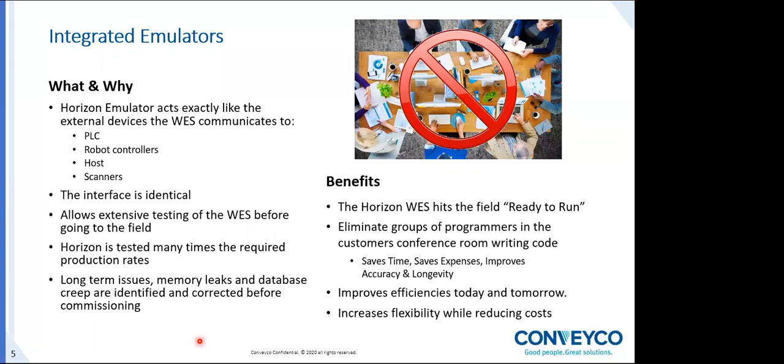The faster a system starts up, the more confidence the operational team has in the system, and that is everything. We want the operational team to believe, and if we want them to believe, we have to be ready, and our stuff has to run. Next.

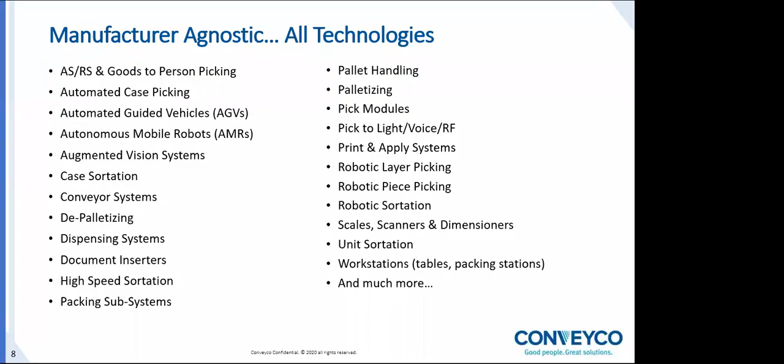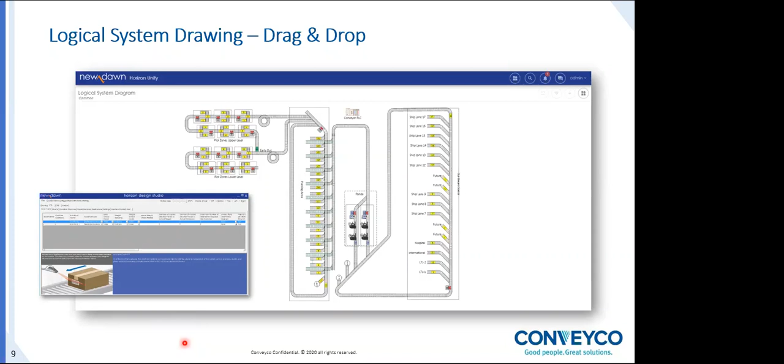This is a key to a lot of our modularity and ability to set things up. And we have a video that we'll jump to here in a second. But what we can do with a Java-based, a Visio-based tool, is create your conveyor system. And we can do this in a very short period of time. And then using that screen you see in the lower left-hand corner there, we have a plethora of parameters we can adjust to configure your system. Let's go to the video. To the videotape.

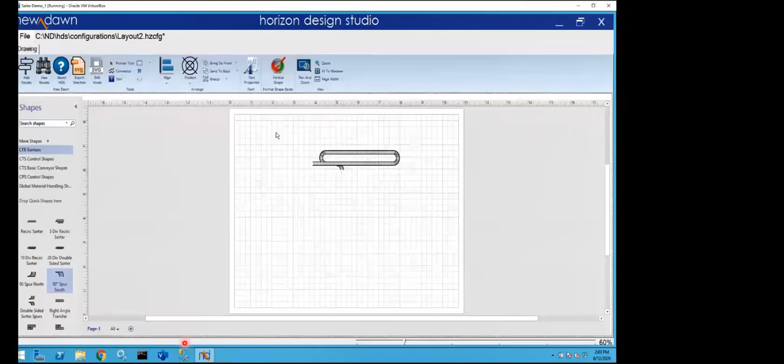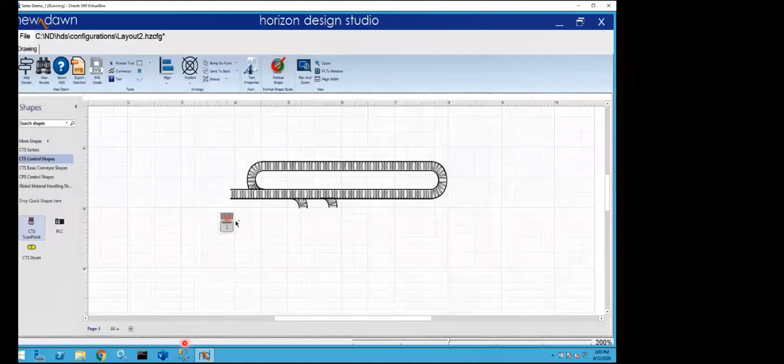Okay, first off, we grab a sample recirculating sorter. And then we're going to throw some diverts on it. Blow it up. Not literally, I hope. Put another divert on there. Then we get to where really the significant part of this is. These are all the control points. We add a scanner. We identify the scanner, and the system gives you defaults, which can be overridden, but 95% of the time are exactly what you want them to be.

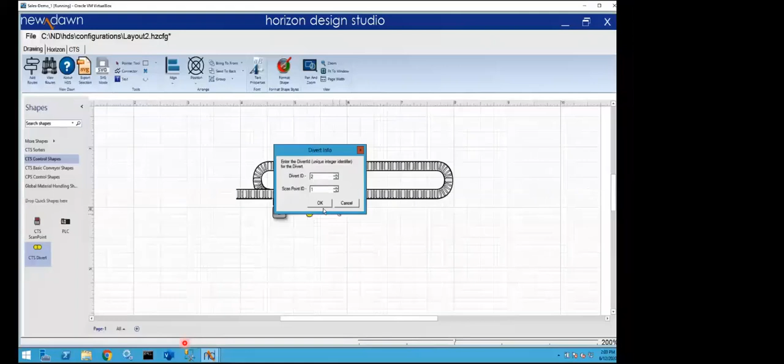This is the first divert. Next divert, and you'll see that this one defaults to divert number 2. We put that in there. Now we grab one more divert for recirc, which is in fact, from a control standpoint, a divert because it's a destination like any other. We assign that to there.

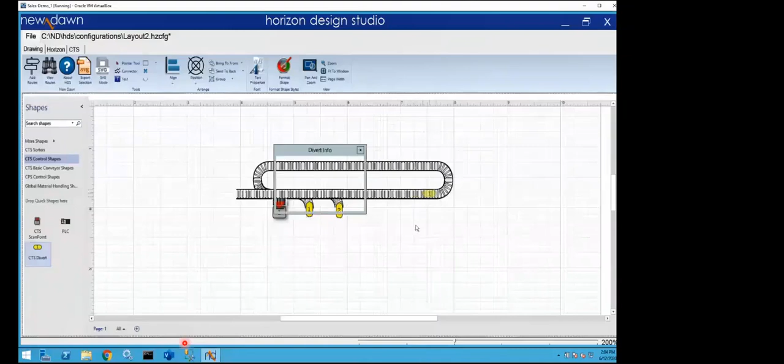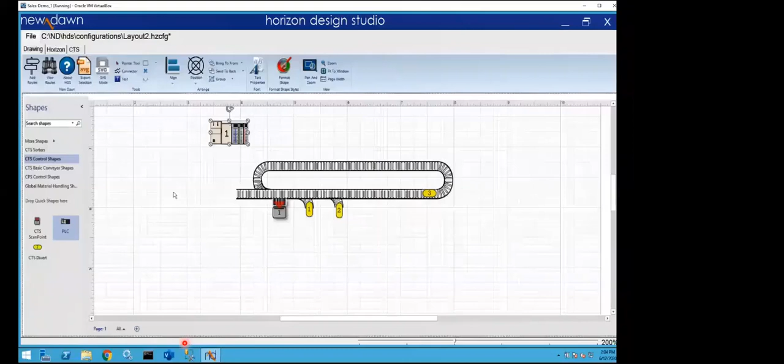Now we go to save it to start to do parameters. But there's a lot of error checking in this tool. As you see, we go up there to save it. We're going to detect an error. We did not assign a PLC here. This sets up our emulator, and our emulator is going to act like a PLC. So now we've got a PLC in there. Now we go to start adjusting parameters. And first thing we're going to do is name this scan point whatever we want to name it. In this case, shipping sorter.

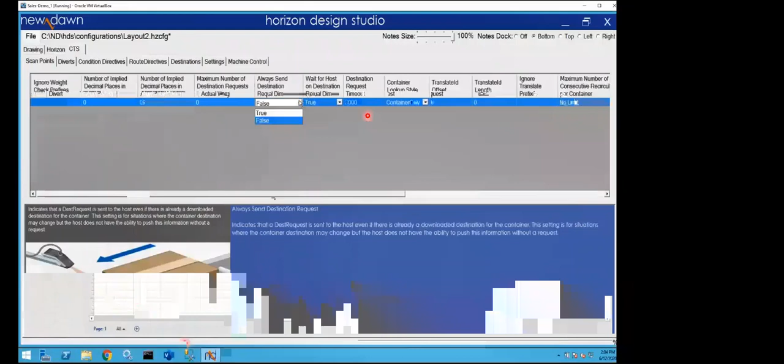And then you'll see here a whole slew of parameters. And by the way, these are just scan point parameters. You'll see, is there going to be a scale? And if so, how's it going to work? We fought these battles so many times, we don't want to make these change orders. If you have a scale and you want to change the weight check mode, it's not a change order, it's just a change here. Here is, do we send a destination request before we assign it? Or do we already have that data downloaded?

As you see, there's just a whole lot of these. And this is just on scan points. There's more on diverts, more on condition directives, route directives, destinations, settings, etc. Here we're setting the number of consecutive recircs we'll allow a carton to do before we reject it.

Here, this area here, we're setting up parameters for what the barcode would look like. Once again, if you change your barcode, we can adjust the parameters here, and it's not a change order, it's just an adjustment.

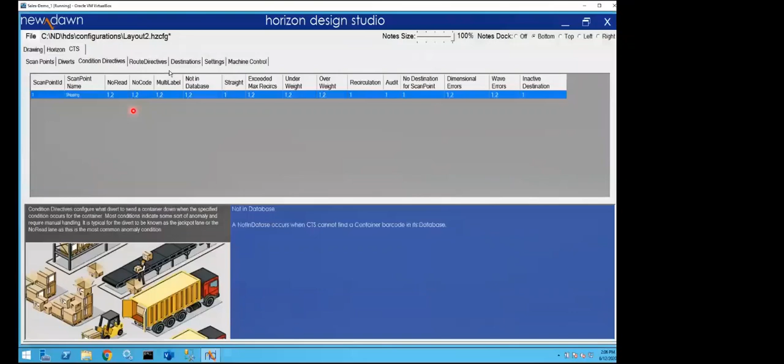Now we're going to go to diverts, and it's a whole other group of parameters. And we can name each divert. And we're setting up what lane gets there in the case of a no read. What lane do we route to? What lane in the event of a no code? Now, frequently, all those go to the same lane.

But if you run into a situation like a tilt tray, you may have one lane for product that you induct on a tilt tray that you don't need, another for no reads, another for multi-codes, whatever. In any case, all that flexibility is in there. If you use it, great. If you don't, that's great as well. Okay.

One of the things that we do is we allow you to set up various different productivity modes for your system. In a period of low activity, you may not want to use all your lanes, or what have you. You may want to change the way they're used. So you can create all these and save them and change them with a click of a mouse any time you need to.

All our parameters are real-time based. So if you change it, it changes immediately. You don't have to go back and reboot or anything like that. Next, please.

Our system will work with any existing ERP or WMS system. Fundamentally, we learned a long time ago that you don't tell a WMS or an ERP how you're going to talk to them. They tell you how they're going to talk to you, and you say, yes, sir, and do it. So our host interface module, we customize it to whatever way this WMS or ERP wants to talk. We then move that into our database in the format that we want it. And this allows us to work with any of these systems.